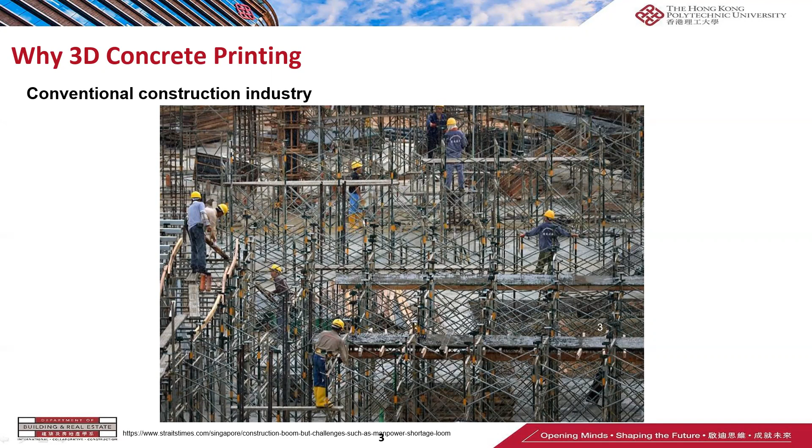Before we talk about why we need 3D concrete printing, we need to understand the limitations in the conventional construction industry. We know that a lot of workers work on site, and the on-site working condition is quite harsh, which may result in many issues, such as safety issues. In US 2019, the construction industry contributed to 21% of fatal injuries with respect to the total number of fatal injuries among various areas.

The same trend can be found in Singapore. In Singapore 2019, the construction industry contributed to 30% of fatal injuries, which is also the highest number among various areas. This kind of high safety issue in the construction industry requires us to develop new technology to improve safety.

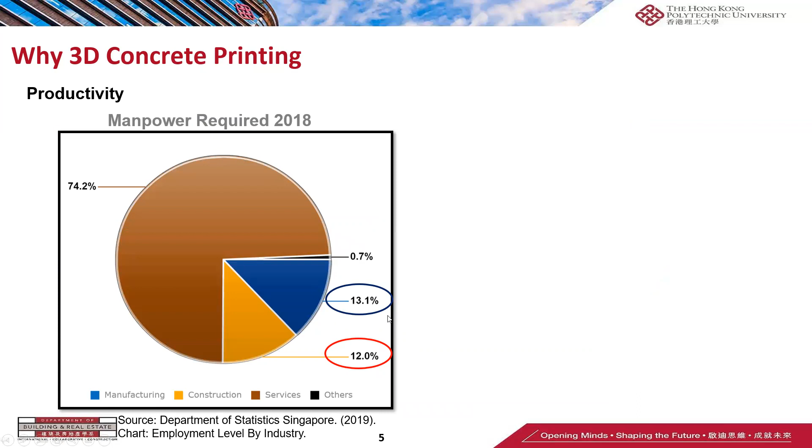Apart from the safety issue, another issue regarding the conventional construction industry is high labor intensity but low productivity. In Singapore 2018, the manufacturing industry and the construction industry had almost the same manpower requirement, 13% and 12% respectively. But the manufacturing industry contributed around 22% of GDP, which is 7 times higher compared with the construction industry. So we can find that manufacturing has much higher productivity compared with the construction industry.

This is mainly because the manufacturing industry has adopted many new techniques to advance its productivity, such as digital fabrication.

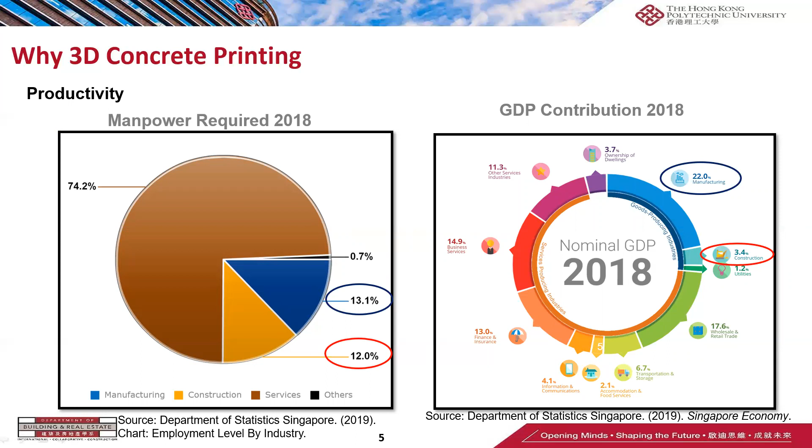In response to the challenges on safety and productivity, the construction industry keeps evolving. From the original methods, which we call conventional methods, we need many laborers to work on site, doing casting work, assembling work, disassembling work, and so on. To improve the conventional methods, precast concrete has been proposed. In this method, some construction elements can be built in the factory, then transported to the construction site for assembly.

After that came prefabricated prefinished volumetric construction methods, or PPVC. In this method, much more complicated construction component elements can be produced in the factory, such as the house unit. They can be produced in the factory and then transported on-site for assembly, and finally produce the whole building.

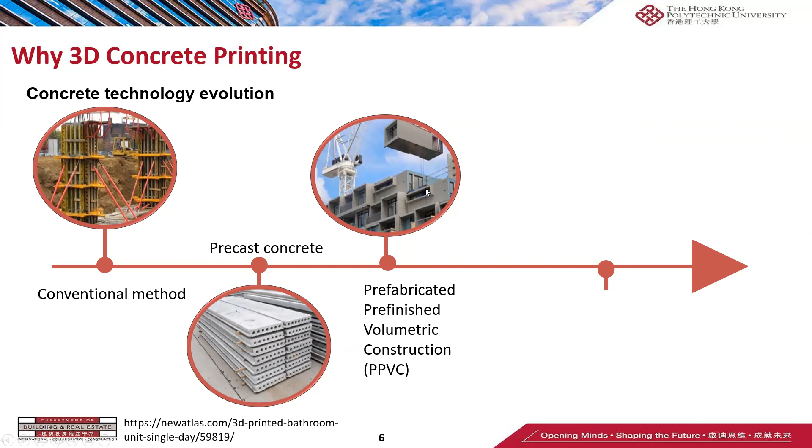And now 3D concrete printing is coming. 3D concrete printing will print the whole building in one go. So why does this technology have great potential to further advance the conventional construction industry? Firstly, we need to understand the benefits of 3D concrete printing.

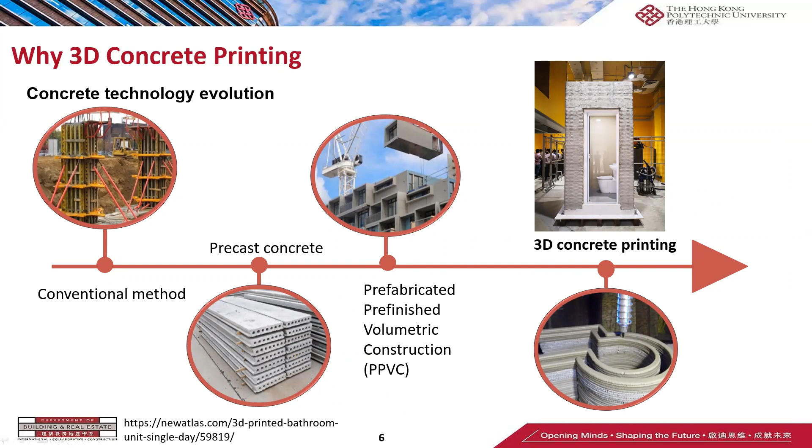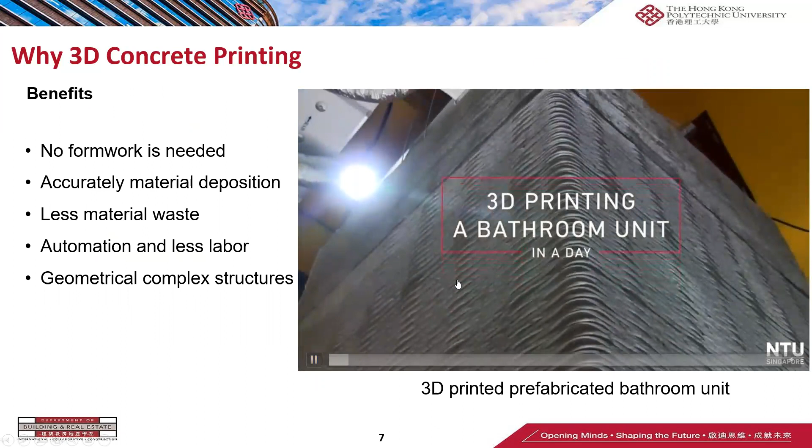To have a better understanding of the benefits of 3D concrete printing, we can refer to this video. This is a prefabricated bathroom unit, which was completed at NTU 2 years ago. We can find that in the printing process, the whole PBU can be printed without formwork, which indicates the cost incurred by formwork usage can be reduced.

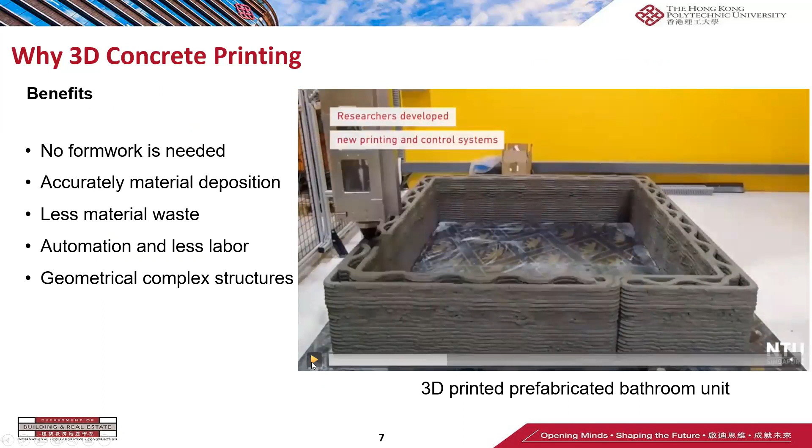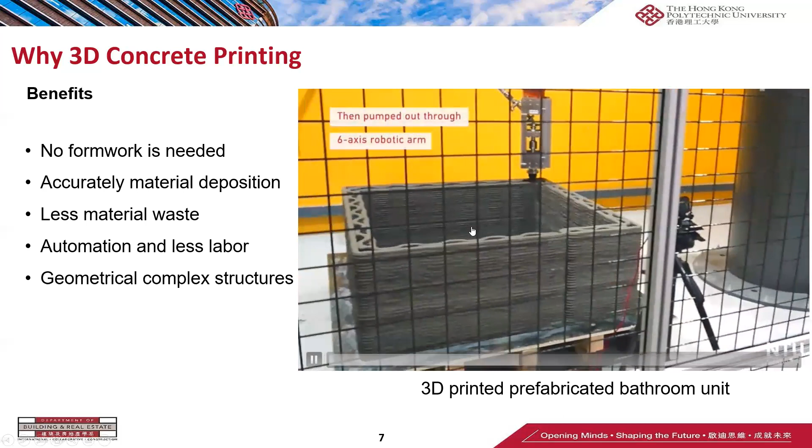At the same time, in the printing process, the materials are deposited accurately, which helps reduce material wasted in the construction process. We only need several workers to monitor the material mixing process and the robotics manipulation process. This reduces safety issues in the construction industry, and makes the working environment better for construction workers.

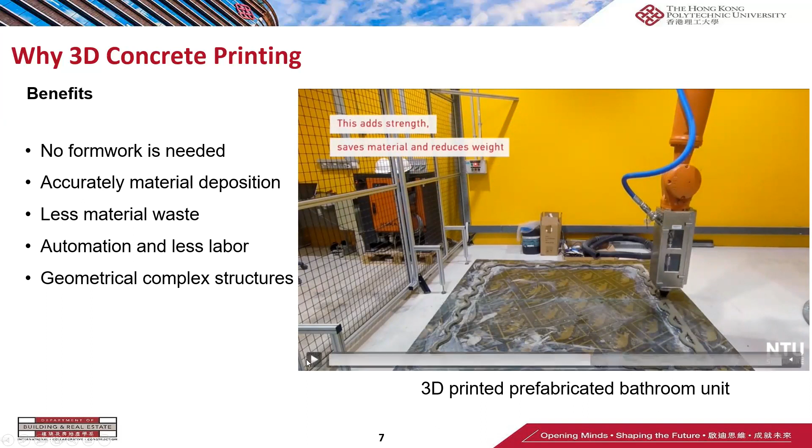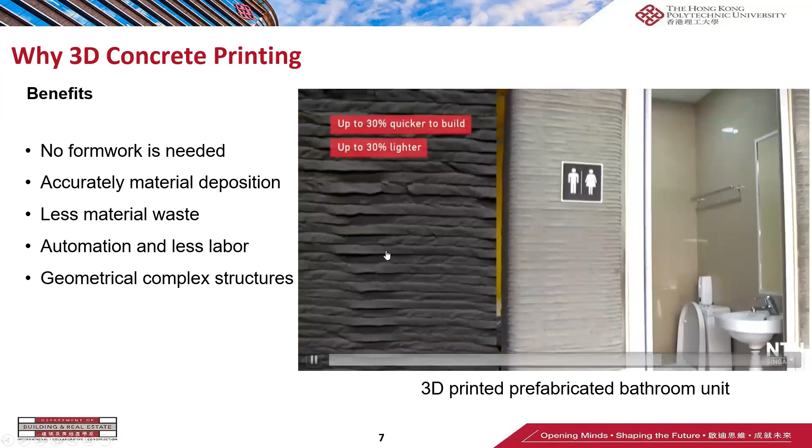Additionally, in the printing process we can produce complex shape structures, which are normally very difficult to produce with the conventional construction industry, mainly due to the high cost incurred by formwork manufacturing. Apart from these advantages, we have done an economical, environmental, and productivity assessment regarding the printed and precast PBU.

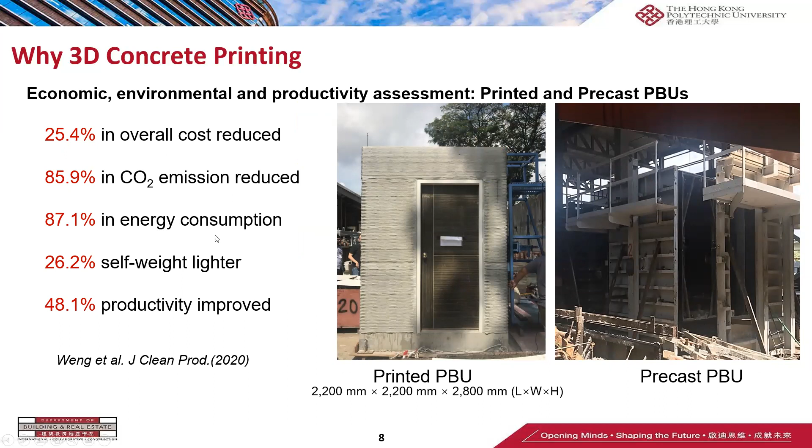The results indicate that regarding all these aspects, the printed PBU can outperform the precast one. So from this, we can find that 3D concrete printing has great potential to further advance the conventional construction industry. That's why in recent years, more and more researchers are involved in this area. You can find the trend of publication output in the last decades—publications in the 3D concrete printing area have increased rapidly, especially in the last 4-6 years, with an exponential increase in publication output.

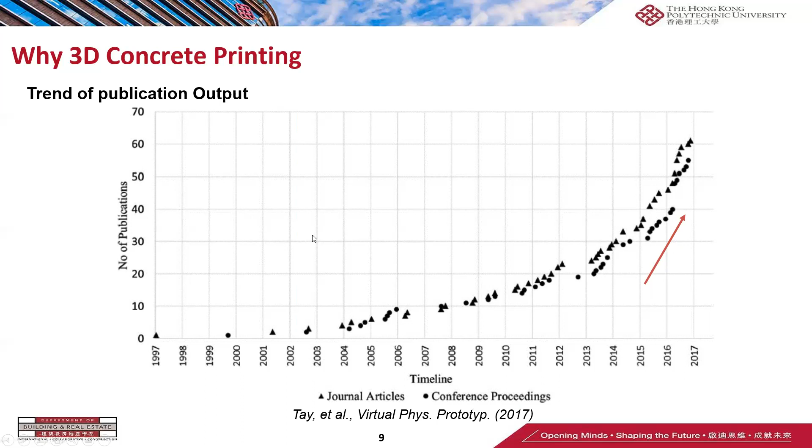Apart from the research works in this area, more and more large-scale construction applications have been implemented in recent years, especially in the last 10 years, as you can find from this figure here.

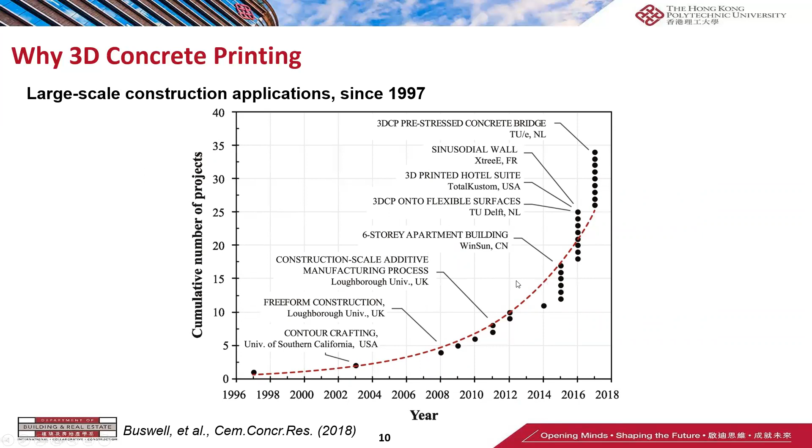So now we can understand that 3D concrete printing has developed very fast in recent years and has great potential to advance the conventional construction industry. So next, let's see how we can do 3D concrete printing.

3D concrete printing was invented by Professor Khoshnevis at the University of Southern California. Initially, this technique was called contour crafting, which means we use this kind of gantry system to print the contour of the house, and then the concrete materials will be poured inside this formwork. Finally, we can produce the whole building.

But now in recent years, more and more researchers refer to this technique as 3D concrete printing, because this method is a type of layer-by-layer method. So researchers much more prefer to use '3D concrete printing' as the name of this technique.

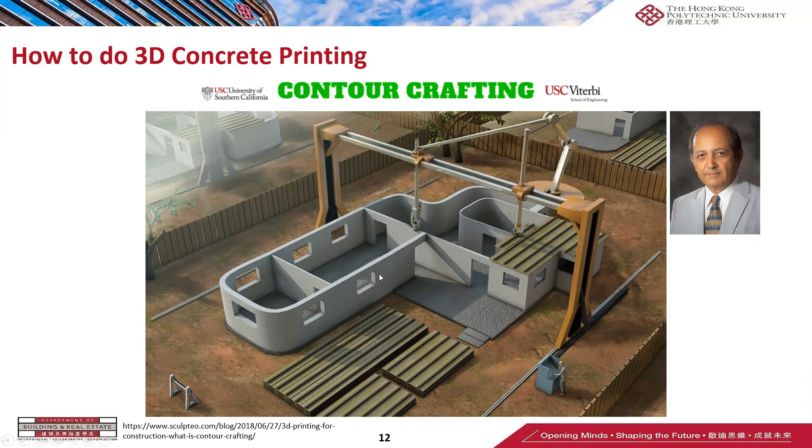In the 3D concrete printing process, normally we have 3 phases. In the production phase, we need to mix the materials—we have the dry mix and also the wet mix to ensure the material can have sufficient performance for the concrete printing process. Once the material is ready, in the second phase, the pumping phase, the material will be conveyed by the pump to the nozzle tip for the printing process. Then in the third phase, the printing phase, the concrete printer will control the nozzle to move around and deposit the concrete materials to produce the final shape of the structure according to the designed 3D model.

In the first phase, we need to have certain materials which can be used for concrete printing. Then in the second and third phases, we need to have the printing system to ensure the material can be delivered and printed. In the printing phase, we need special devices—the nozzle—which helps to shape the materials. We can also design special functional nozzles to achieve special purposes.

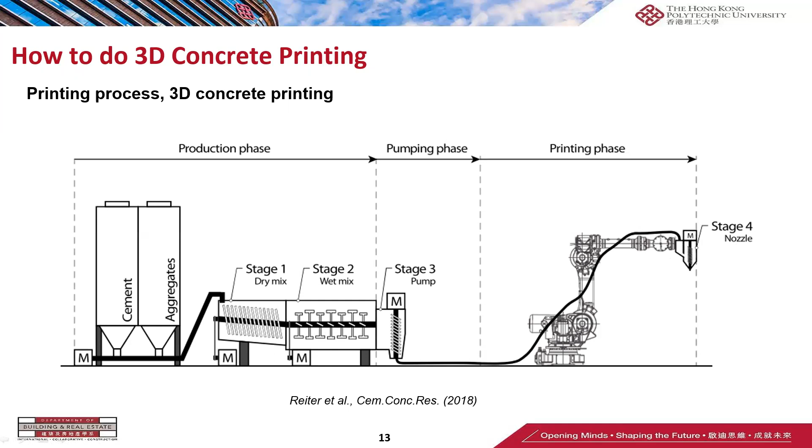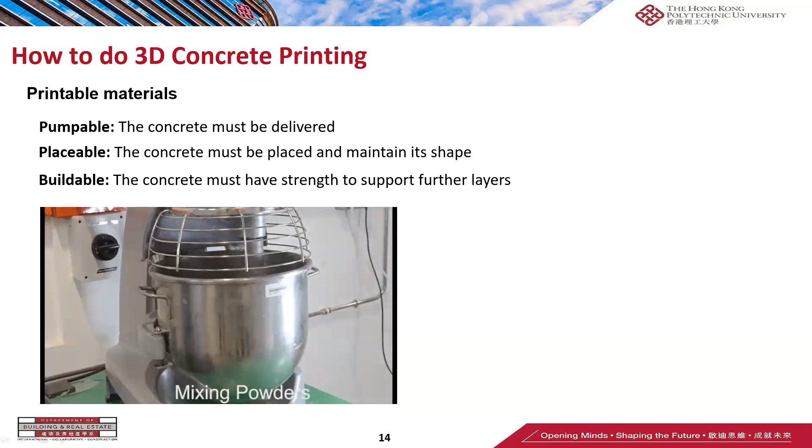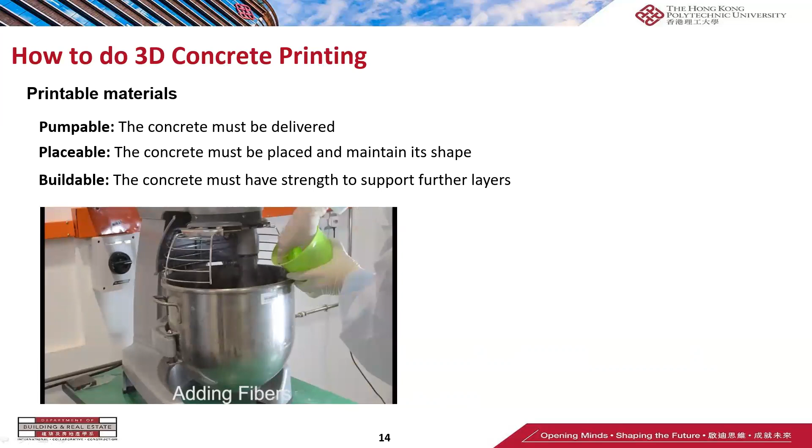As mentioned previously, in the first step we need printable materials. The printable material mixing process is similar to conventional materials—we need to mix all the powders together, then add water, and sometimes add some additives to ensure the material can satisfy the requirements regarding pumpability, placeability, and buildability.

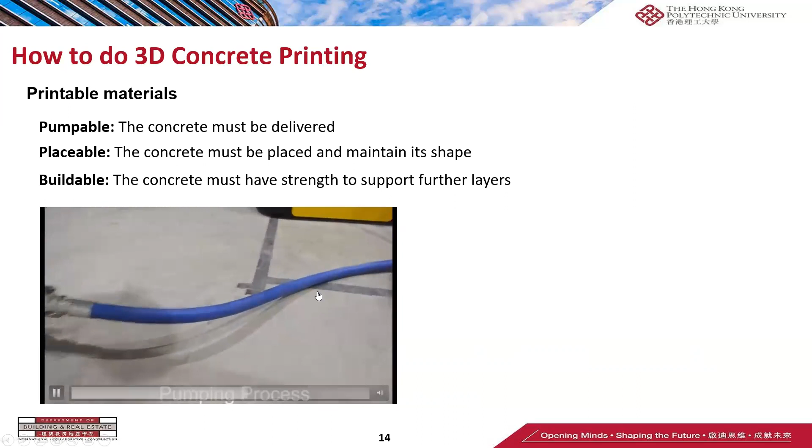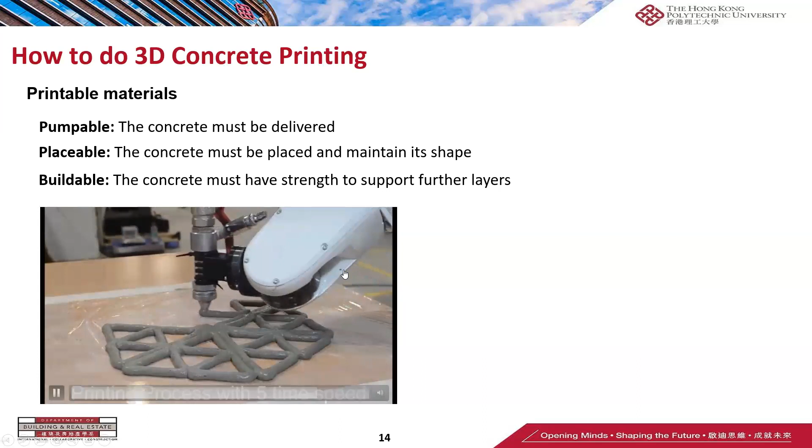Pumpable means the concrete materials must be able to be delivered by the pumping system. Placeable means that once the material is printed out from the nozzle system, it should maintain its shape and be placed. We know that in the concrete printing process, it's a layer-upon-layer manner, so the material needs sufficient strength to support further layers of material.

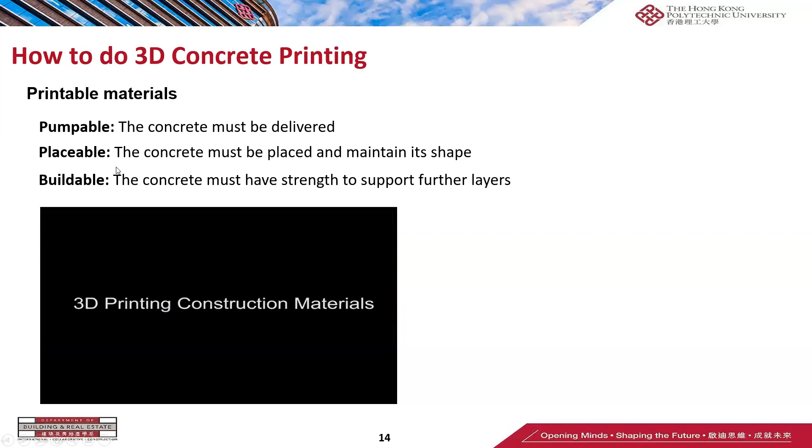All these requirements regarding these three aspects require us to design the materials very carefully. We can use supplementary cementitious materials and chemical additives to modify the material's rheological performance to ensure it can satisfy the requirements. Once the material has the satisfied rheological performance, it will be used for printing. In the printing process, the rheological performance ensures the material can satisfy the requirements regarding pumpability and buildability.

Finally, the materials can be used to print high-rise structures, high structural components, and so on and so forth. So in the first step, we need to have the printable materials. Once the material is ready, in the second step, we need to have the printing system.

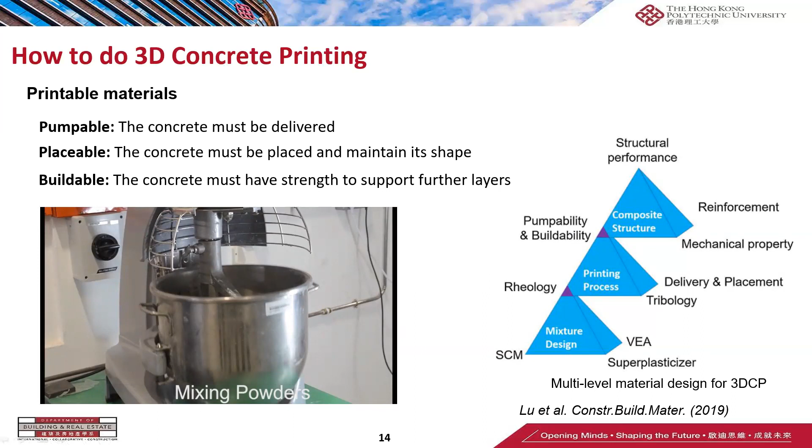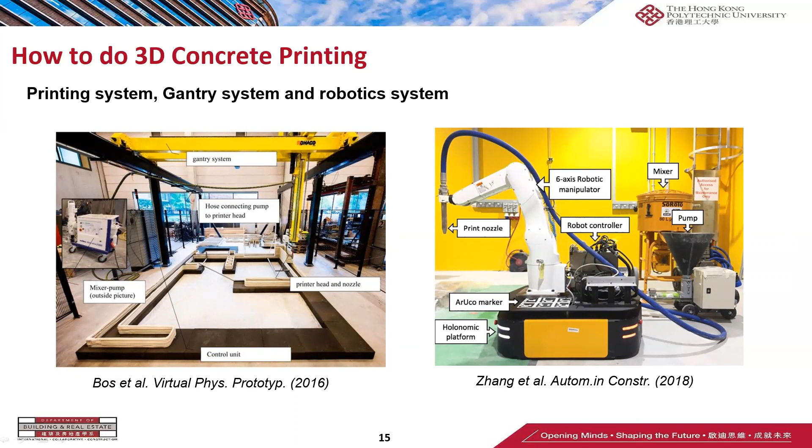So with the printable materials and the printing system, we can achieve the concrete printing process. But in some cases, if we want to achieve some special functional materials, we can further design the nozzle system for this purpose. If you search online, you can find many different types of nozzle systems used in the concrete printing process. But in this presentation, we will just take several examples for explanation.

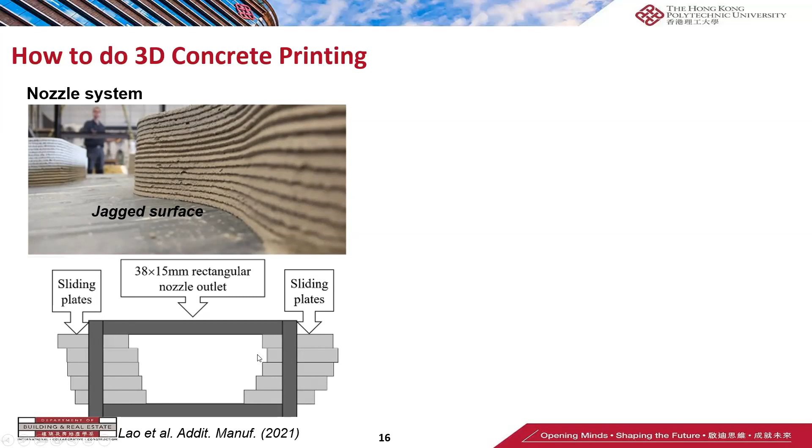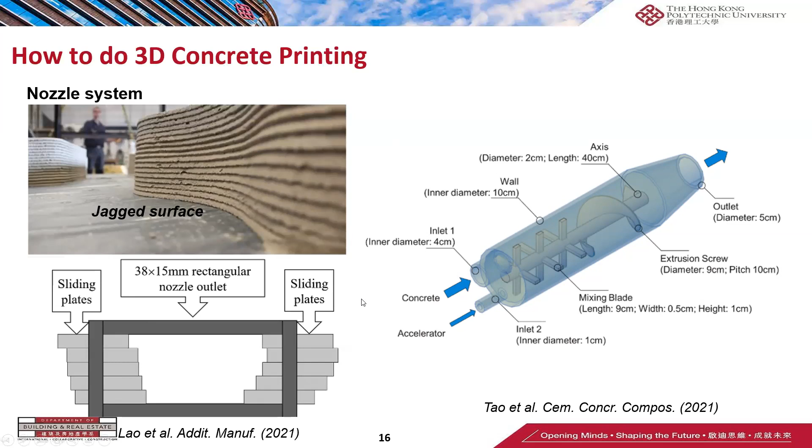So with the printable materials, printing system, and some special nozzle systems, we can do a lot of interesting things in the concrete printing technique process. For example, we can use 3D concrete printing to print the concrete tree and reception table. The concrete tree is a type of modular printed structure. In the printing process, each segment will be printed separately. When all these segments were printed, they will be assembled together to produce the final shape of the concrete tree.

The reception table printing process is quite different from the concrete tree. The reception table is printed in one go, which means we design the reception table in certain software. Then after we obtain the machine code for the concrete printing process, the whole structure will be printed at one time.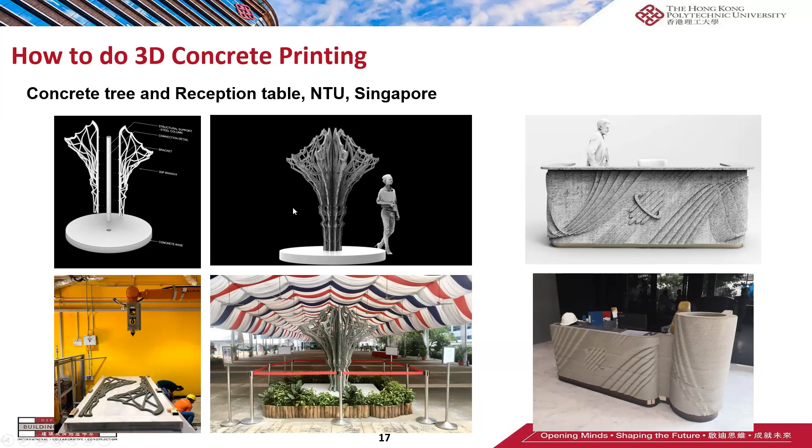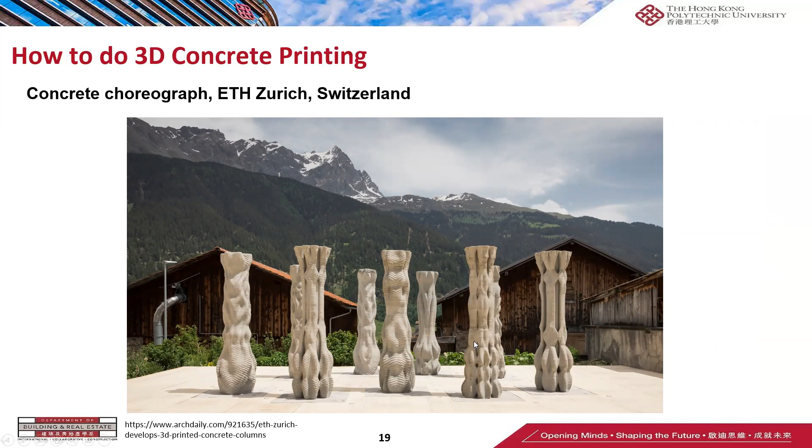Concrete printing process has been adopted to produce columns with very complex structures. These columns were designed by computational design methods, then printed by the 3D concrete printing process. After the formwork was printed, steel reinforcement was introduced into this formwork system, and then concrete material will be poured inside to further enhance its durability and mechanical performance.

At the same time, 3D concrete printing can also be adopted for practical applications for residential houses, just like this. This house was printed by TU Eindhoven in the Netherlands just this year.

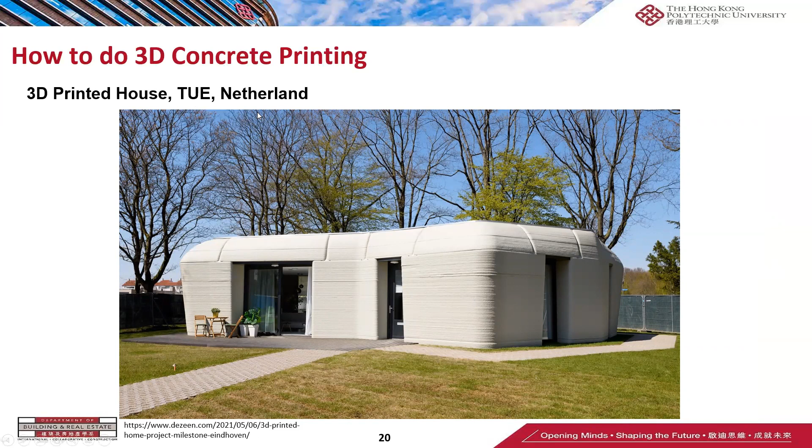So just now we talked about the benefits and also how to do 3D concrete printing. Next, let's talk about several challenges in this area.

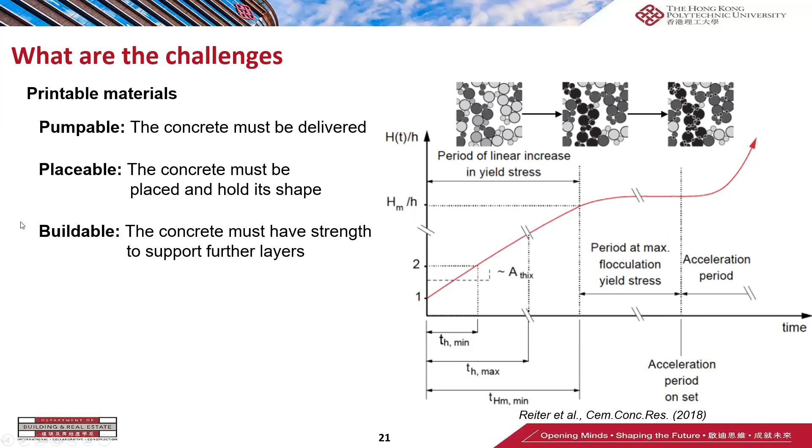For the printable materials, we need to optimize the material performance to ensure they have sufficient pumpable, placeable, and buildable properties. All these properties are highly related to the material's rheological performance, or yield stress. But the material yield stress will change with time because of the hydration process. So the first challenge in concrete printing is to build a model linking material rheological performance with the buildability performance of the concrete materials.

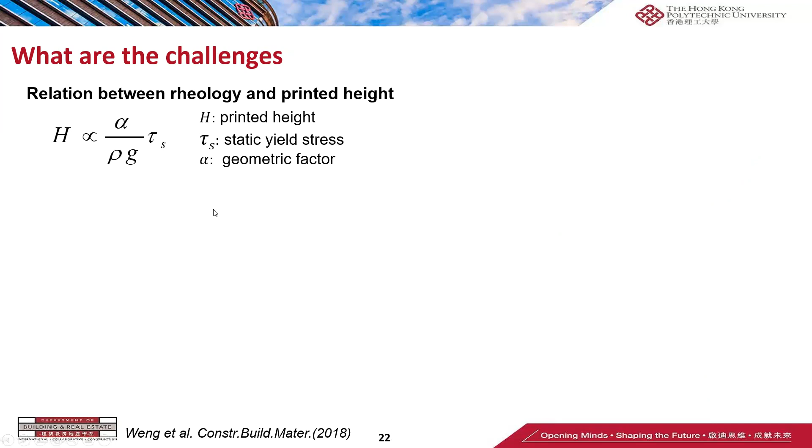A model was built to correlate the relationship between material property and the printed height of the materials. To achieve materials with different rheological performance, different gradation methods were adopted in the material mixing process: continuous gradation, uniform gradation, gap gradation, and natural gradation. We then measured the material's rheological performance, and you can find they have different rheological performance with respect to yield stress.

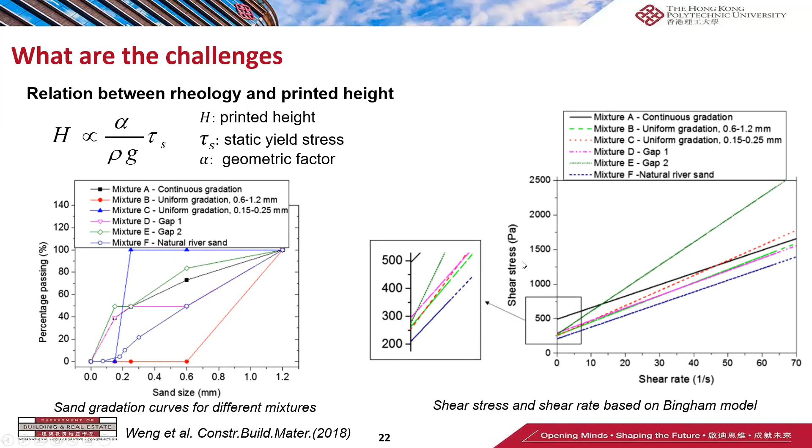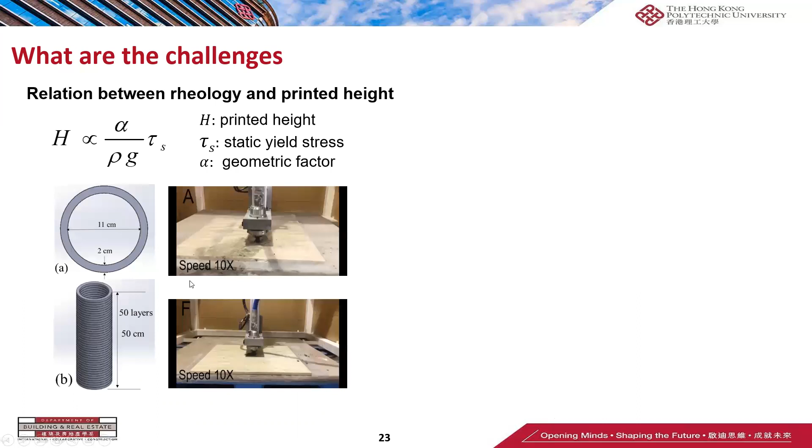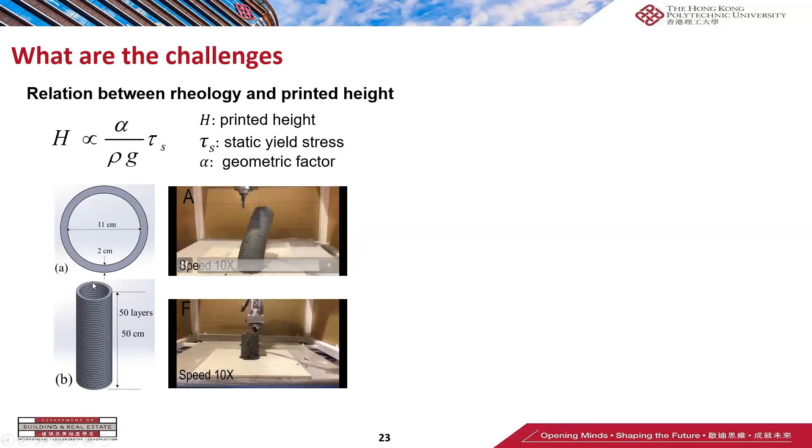To further validate this model, we designed hollow column structures for the printing process. The concrete printer printed the whole structure, and the maximum height was recorded to indicate the printed height of the materials for this structure. You can find that this model has very good prediction regarding the relationship between material performance and the maximum printed height.

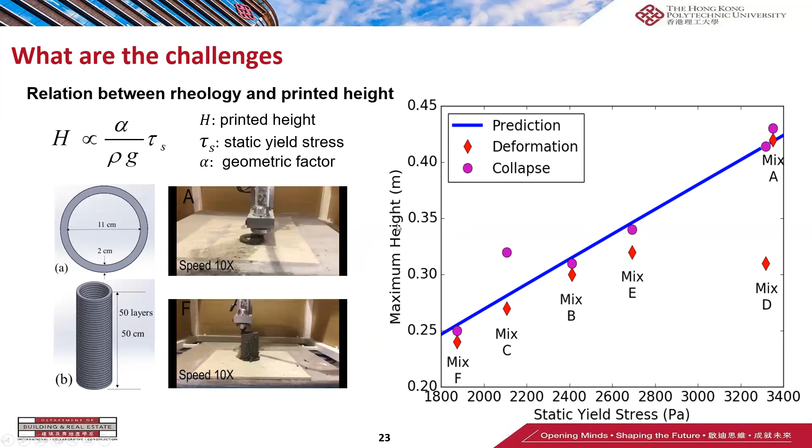Another challenge in 3D concrete printing is the interface issue. We know that concrete printing is a layer-atop-layer process, and because of this unique construction method, the weak interface can be a big challenge for this technique.

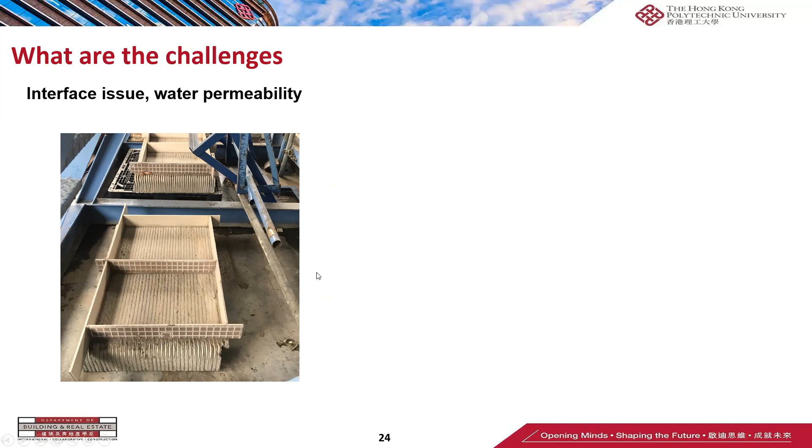This is a 3D printed concrete wall. We used tiles to form a water pool, like this, then poured water into this area. In the test, you can find that the water directly penetrates through this concrete wall system, mainly because of the weak interface in the printed structure.

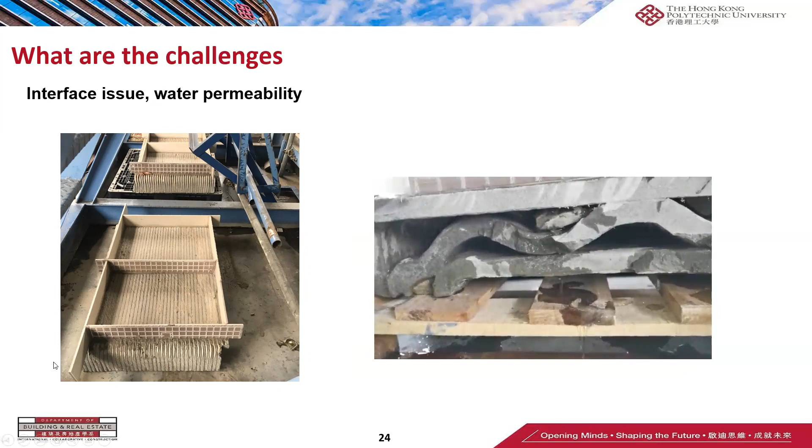Why will the interface be weak? The weak interface is mainly caused by the time interval between layers. For example, when we print a small structure by 3D concrete printing, it starts from this point, the starting point. For the small structure, it takes around 5 seconds to reach the same point on the second layer. We define that 5 seconds as the time interval between layers.

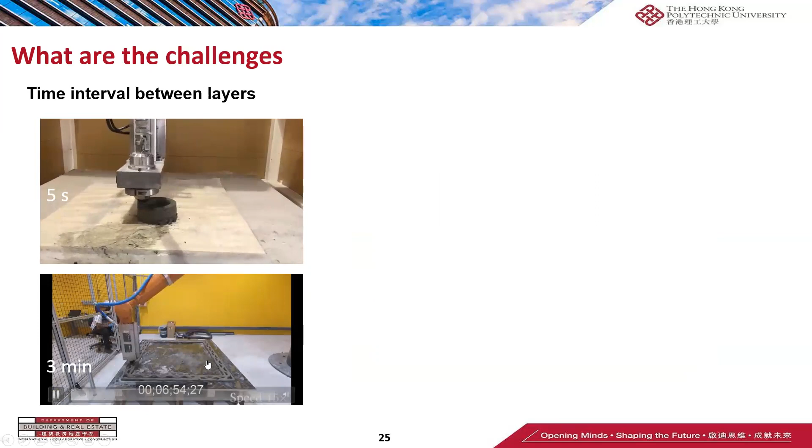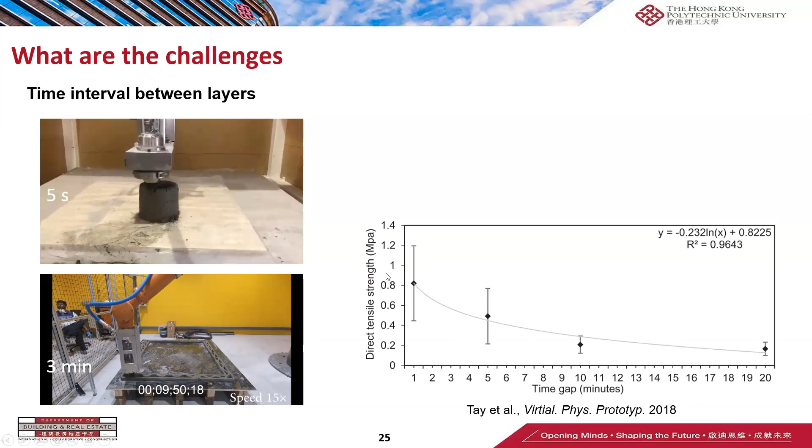For a small structure, the time is quite short, maybe several seconds, to finish one layer. But if we print larger structures, just like this, the time interval between layers can be as long as several minutes. With the increase of time interval between layers, it affects the mechanical performance of the interface—you can find that the direct tensile strength decreases. Apart from mechanical performance, the porosity between the interface also increases with increasing time interval. That's why the interface is a big challenge in this area.

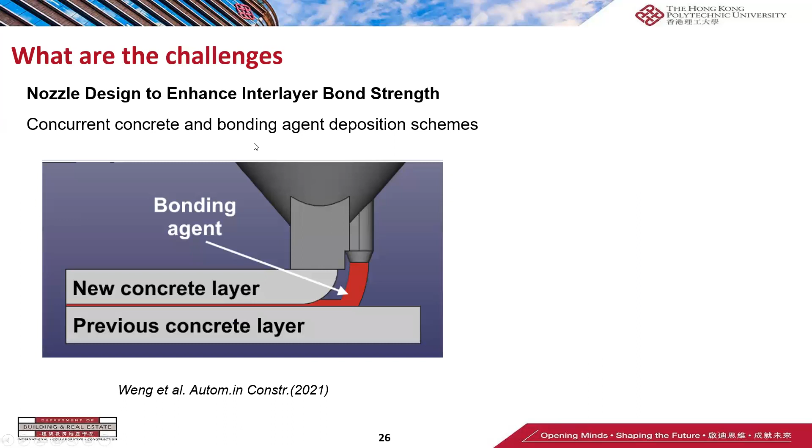To address the interface issue, we designed a nozzle system which can deposit a bonding agent between the interfaces. This bonding agent helps enhance the bond performance of the final printed structure. We call this printing scheme the concurrent concrete and bonding agent deposition scheme. This is the design prototype of the nozzle system—you can find it has two flow channels, one for the concrete flow process and another for the bonding agent flow process.

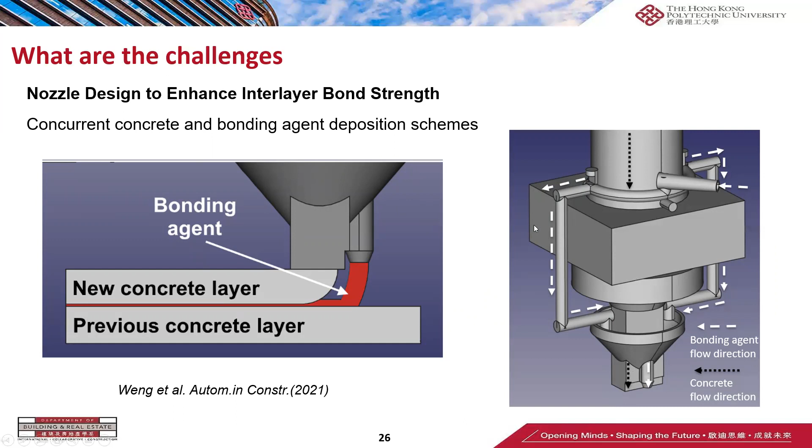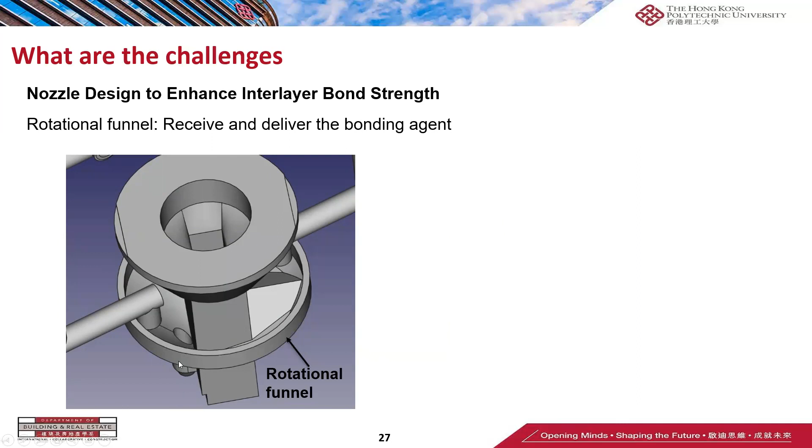Once the bonding agent reaches the nozzle head, the rotational funnel will be adopted to receive all this bonding agent. Then it will be conveyed to the outlet of this rotational funnel, and finally deposited just atop the previous concrete layer.

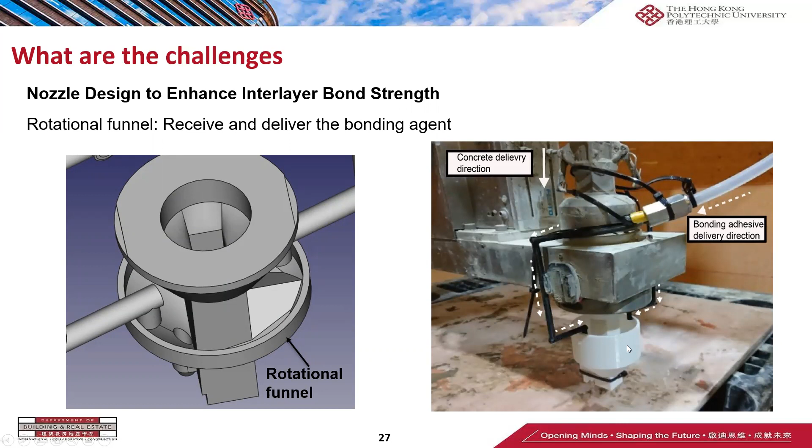This is the prototype of the designed nozzle: two flow channels, one for concrete, another for the bonding agent, and a rotational funnel which can be used to receive the bonding agent. This is the printing system we used for the experimental part.

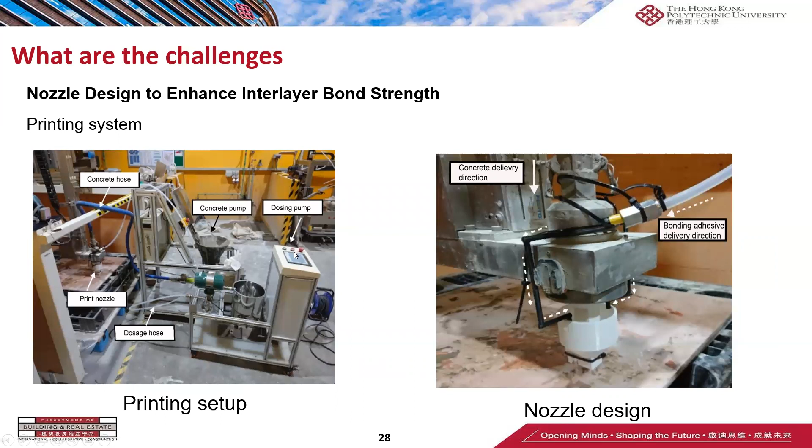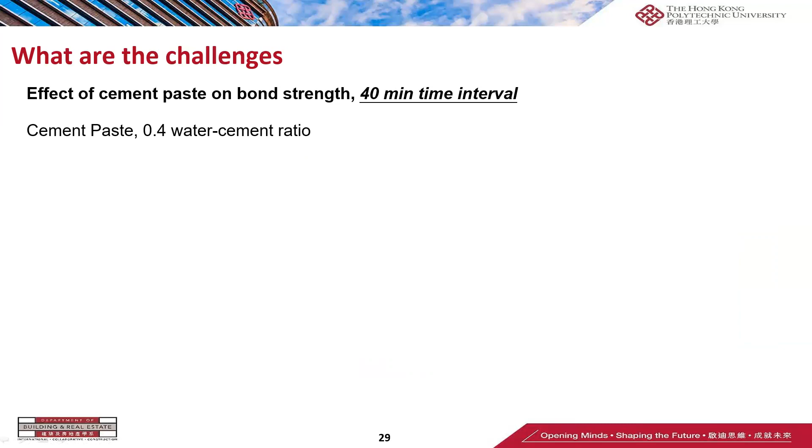We have two delivery systems. One is for the concrete, we call it a concrete pump. We also have another pumping system, which is for the bonding agent. In the experiment, we used cement paste with a 0.4 water to cement ratio as the bonding agent to enhance the bond performance. The time interval between the interfaces is 40 minutes.

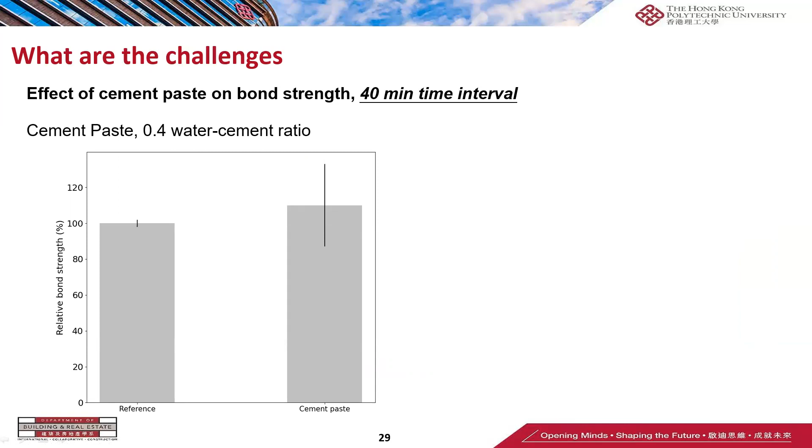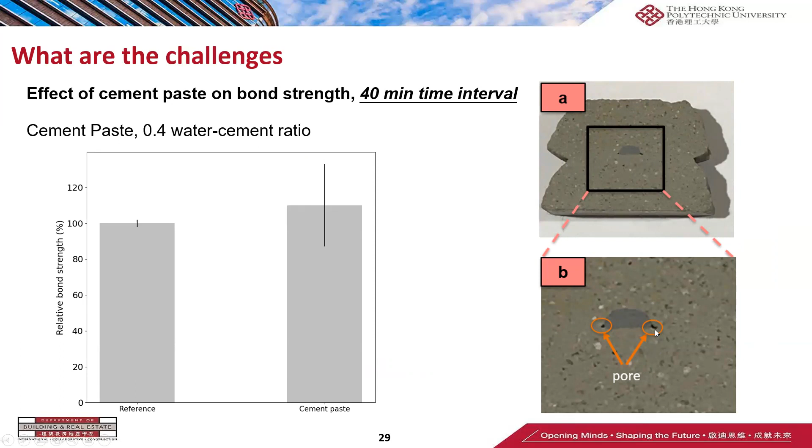So firstly, here are the results regarding the mechanical performance. With the introduction of cement paste between the interface, the bond strength is increased very slightly. This is because the cement paste cannot be evenly dispersed at the interface, and in some cases, the cement paste will incur some big pores at the interface.

To address this issue, we further redesigned our nozzle system. This is the original nozzle system, just like this. In the modified nozzle design, a spreader was attached to the nozzle head. Then the same experiment was conducted.

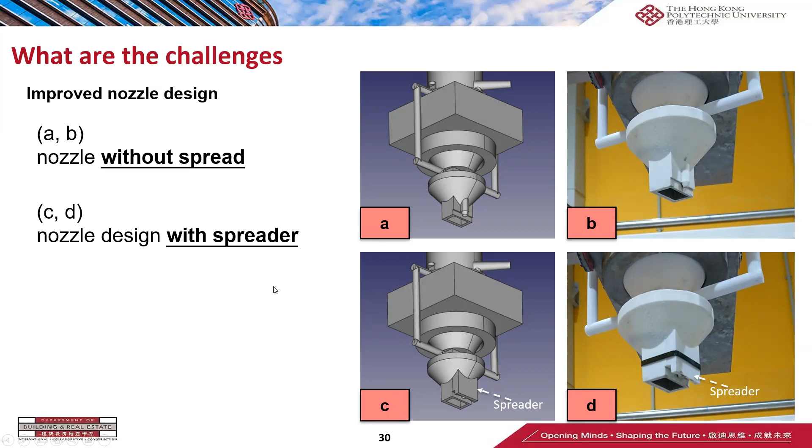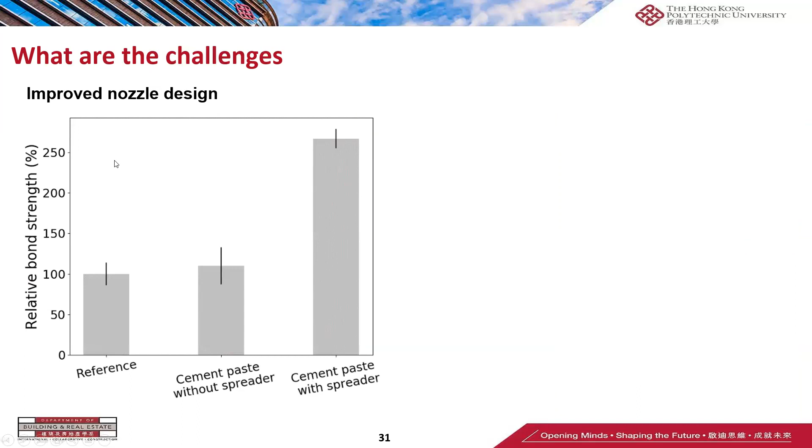Here are the results. You can find that with the adoption of the spreader to the nozzle system, the bond strength can be increased as high as 250% compared with the reference group. This is mainly because when the spreader was adopted, the cement paste can be evenly dispersed at the interface, and finally act as an effective bonding agent between interfaces to enhance the bond performance.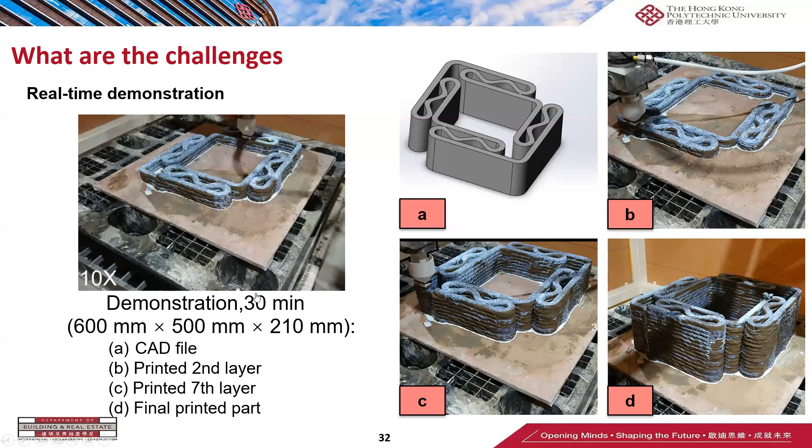The next challenge I want to talk about is how to integrate BIM with 3D concrete printing. We know that BIM is a very powerful technique to digitalize the 3D construction industry. How to integrate BIM with 3D concrete printing is a very interesting topic for us to explore. In this preliminary work, we have done some work to integrate BIM with 3D concrete printing, especially for the printing path generation.

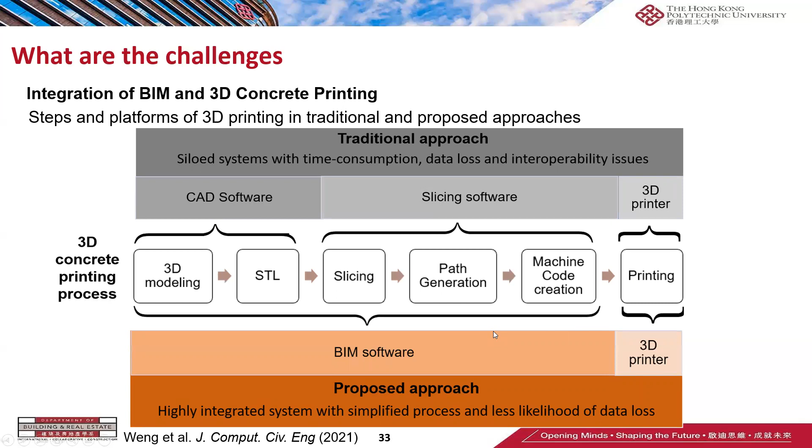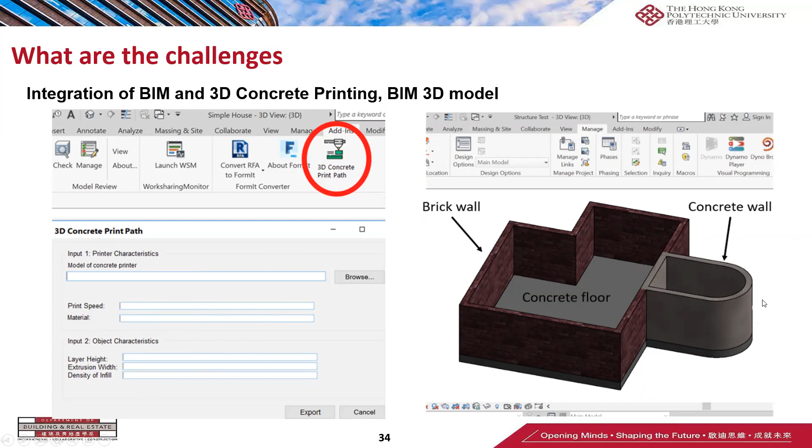Then in the user interface of the 3D concrete printing plugin, we can define which material we want to print. For example, we want to print a concrete wall, so we just input the concrete wall here. At the same time, we can input the print speed, layer height, extrusion width, density of infill, and so on, all the parameters required for the concrete printing process. Then this plugin can automatically detect the concrete wall in Revit and generate this kind of continuous printing path for the concrete printing.

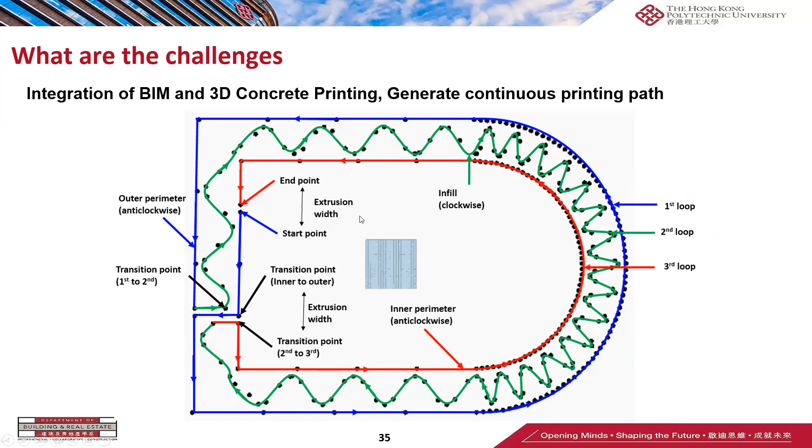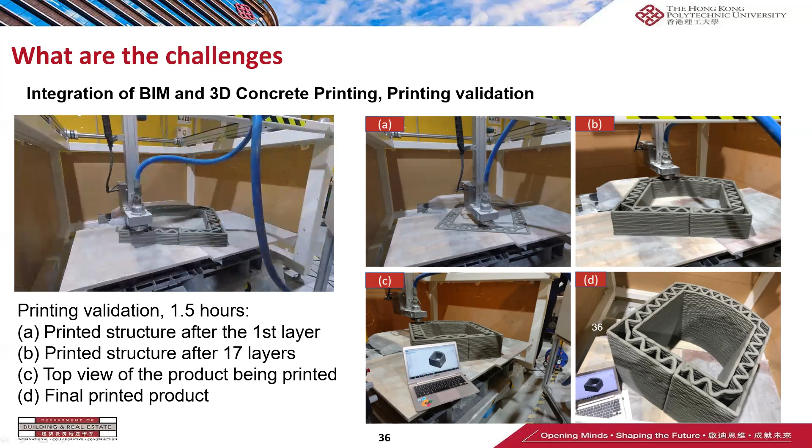So just now I have mentioned several challenges in the 3D concrete printing process. Now I want to further make a summary regarding the future challenges in these areas.

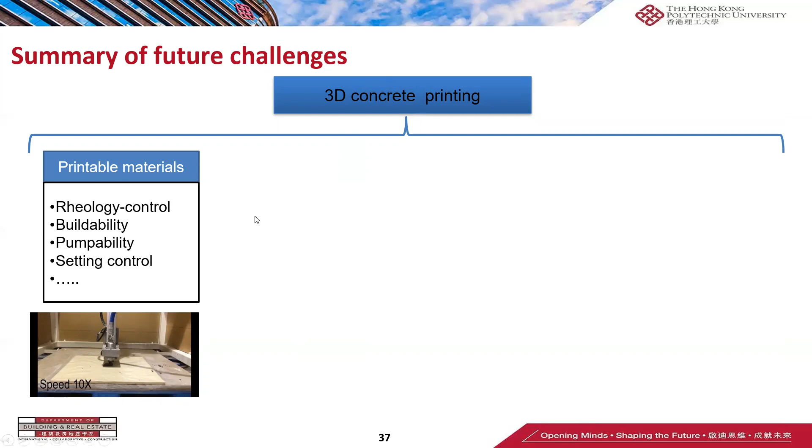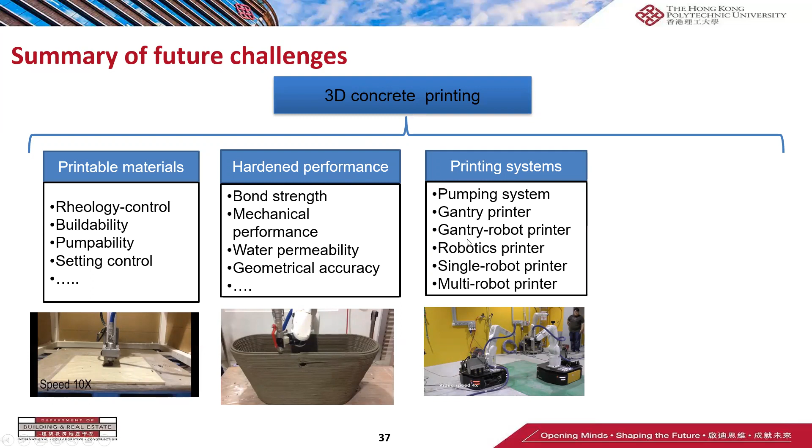At the same time, we can design special devices to control the geometrical accuracy of the final printed structure, and we need to put more effort into developing a more advanced system to further enhance the automation of the concrete printing process.

Apart from this, we also need to find proper methods to integrate BIM and LCA design techniques into the concrete printing process, to increase the feasibility of this technique in the future.

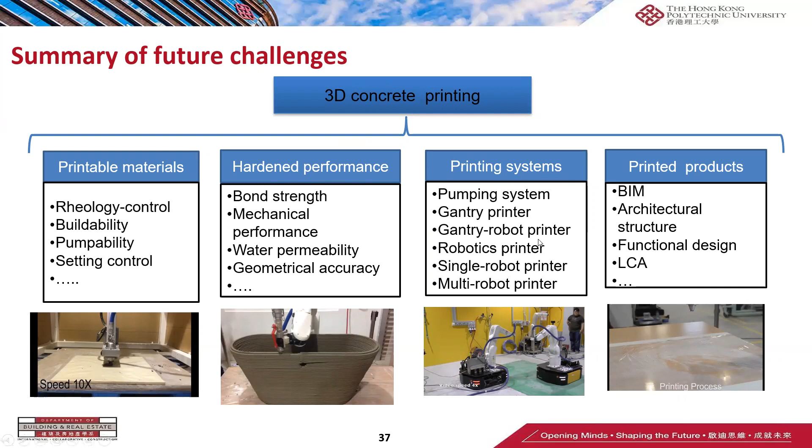Then, what can we do in the future by using 3D concrete printing? This is a perspective on the next generation of digital construction. We can design the 3D CAD model into the BIM platform.

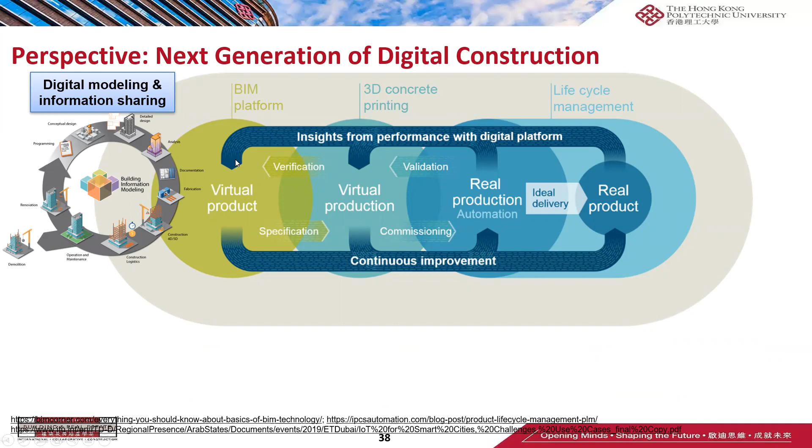In some cases, we can use special design techniques such as computational parametric design and topological optimization to design certain functional structures, and this kind of functional structure will then be sent for process simulation.

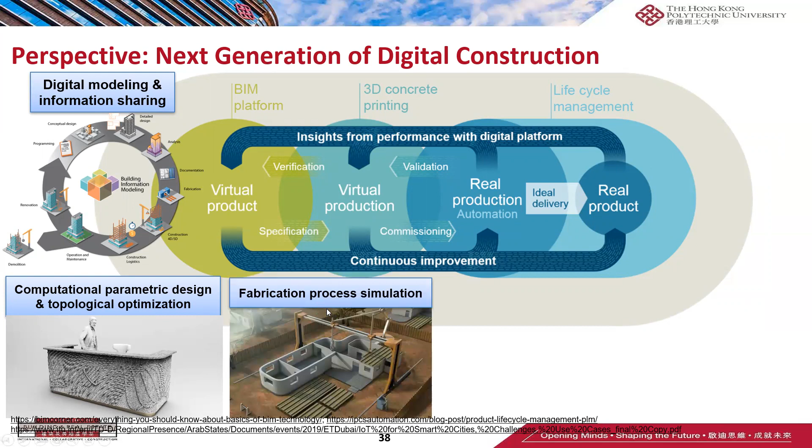Using virtual equipment, once the customer is satisfied with the design and the simulation indicates the structure can be constructed by certain methods, the designed model will be sent for real production, perhaps by 3D concrete printing.

Once the whole structure is ready, a sensor system will be incorporated into the final structure to collect data. This data can then be fed back to the BIM platform for construction management, life cycle assessment, and facility management. By using this kind of closed loop production process, we can achieve smart buildings and digital construction in the future.

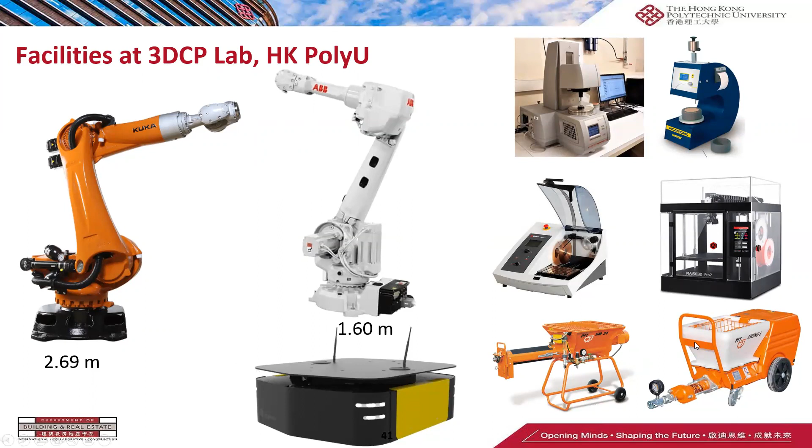Junhong will work on printed materials, Yuji will also work on printed materials, Tenfei will work on BIM and 3D concrete printing, and Dusong will work on robotics and 3D concrete printing.